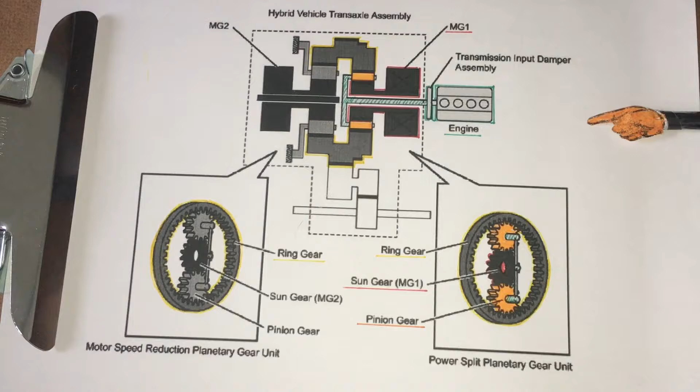So, how to make sense of a hybrid vehicle in simple terms? Just an introduction. I came across this drawing in the manual here, guys, and I think this is as good as any place to start to try and get an appreciation for the overall workings of a hybrid vehicle, in this case the Prius C.

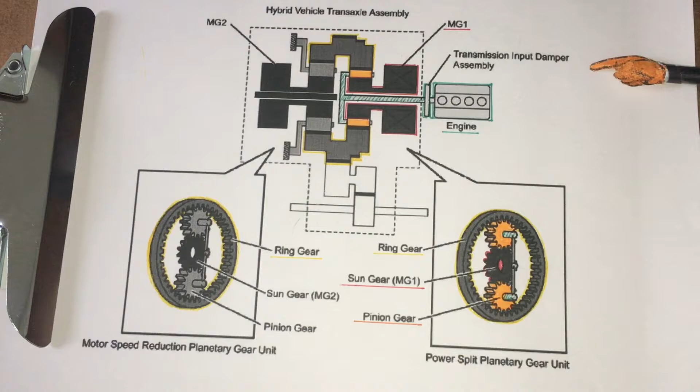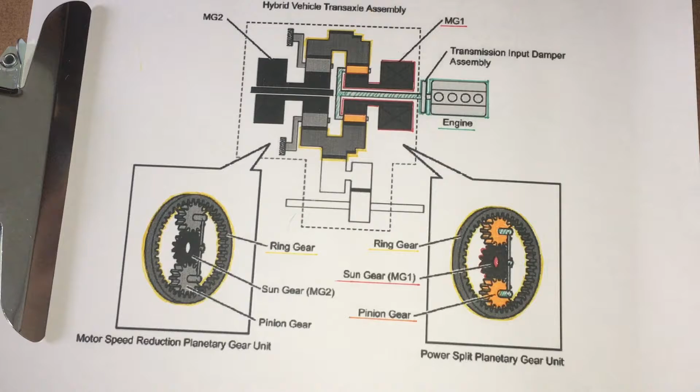So what we actually have on this drawing is, obviously, a hybrid vehicle takes an internal combustion engine, and generally speaking a motor generator is combined in a power splitter device of sorts in order to utilize the best characteristics of both, realizing the efficiencies from that process.

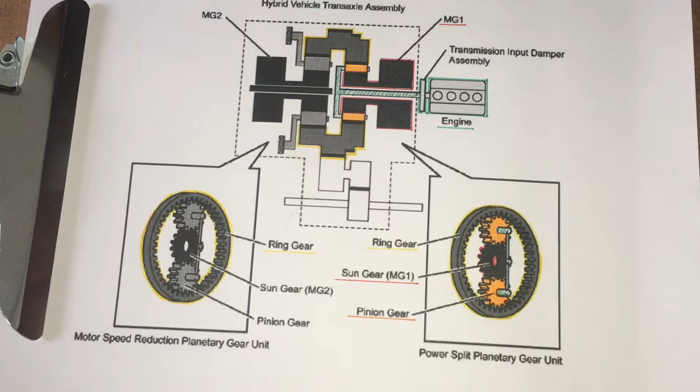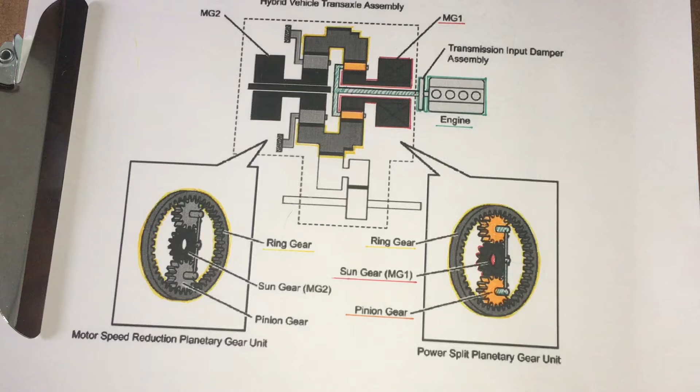So what do we actually have on this drawing? We have the transaxle assembly or power splitter device, which basically consists of a cluster of two planetary gears combined into the one assembly, and it affords us the electric or electronic CVT function.

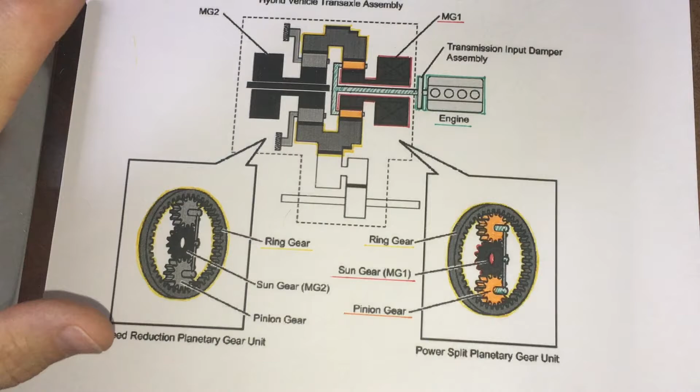It's an ingenious device, a wee bit difficult to wrap your head around initially, but we'll take it one step at a time. What I'll do in this segment is simply discuss one mode of operation, just the ready function, where you actually step into the car, power it up, and nothing more.

So you're essentially sitting there with the vehicle powered up in park, and we'll see what transpires. We'll go through a scenario. So again, what do we have on the drawing? The power splitter device, the two planetary gear stacks, motor generator number 1 and 2.

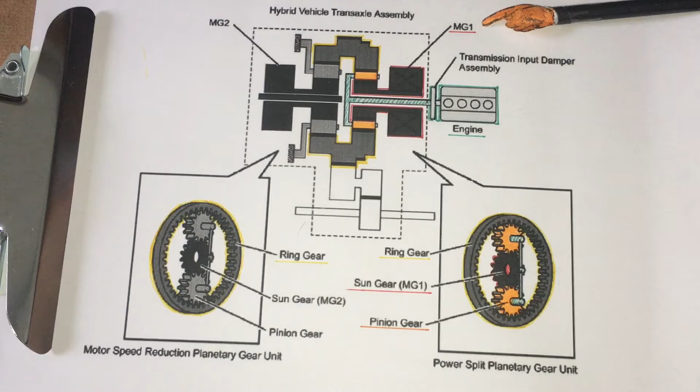In general terms, guys, on the Prius C, motor generator number 1 is utilized for a traditional starter operation and alternator operation. That is to say that we can start the vehicle utilizing MG1. We have no traditional starter—it's done utilizing the motor generator 1 function.

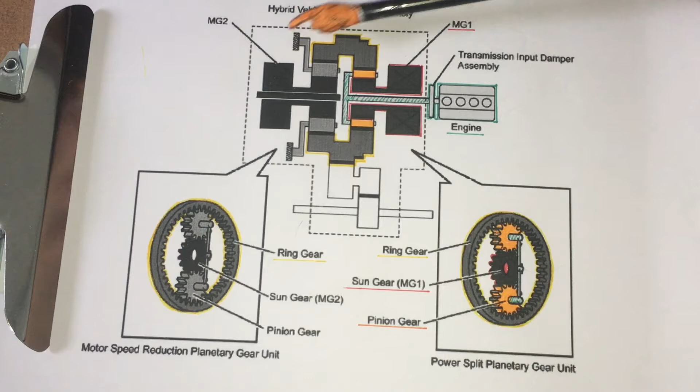And we have motor generator 2, which in general terms affords us the traction effort. So it gives us electric drive operation, if you will. And we can combine the internal combustion engine, shown in green here, and motor generators 1 and 2 in different modes of operation, again in order to realize maximum efficiencies.

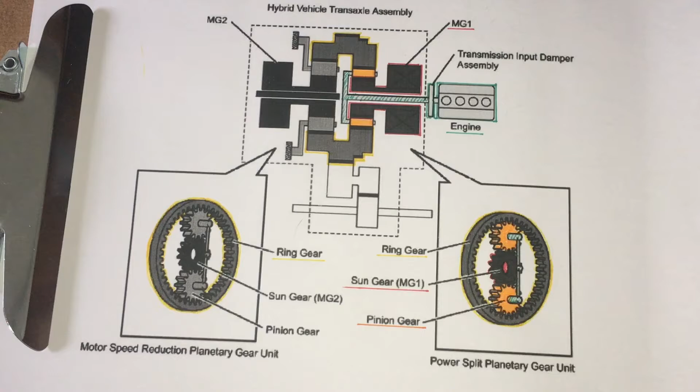So you can see the planetary stack 1 and 2. We have a common ring gear here, guys. I've color-coded this drawing here to try and let you appreciate it in a wee bit more detail. I realize it's fairly dark and difficult to see the details, but it's the best drawing I could get my hands on. So we have the ring gear here shown in yellow.

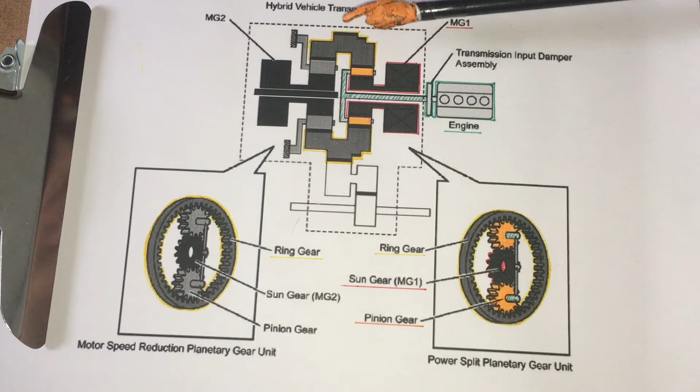The two planetary stacks here have a common ring gear. Keep in mind here, guys, that if this ring gear is turning, the wheels are turning. You may be able to realize in the drawing, it shows the ring gear going to the pinion for the final drive. This is actually the differential assembly going out to the two front wheels in the case of the Prius C.

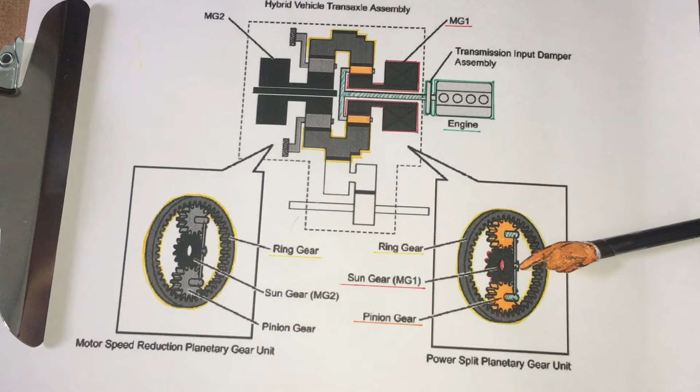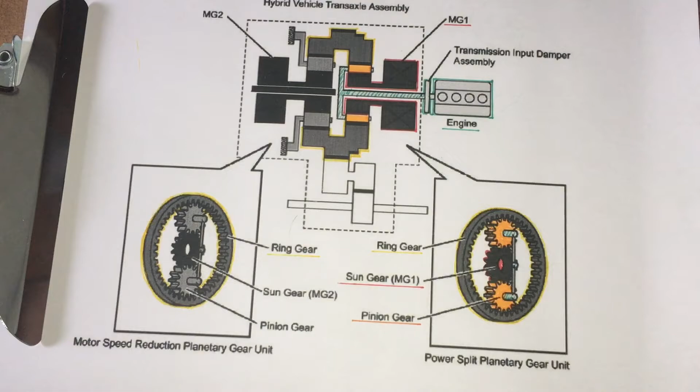And I appreciate there's 2 of these, guys. I'm really only going to focus on the right hand side of the drawing, because it's the part that actually deals with that one mode of operation I'm talking about, just where you're sitting with the car actually ready.

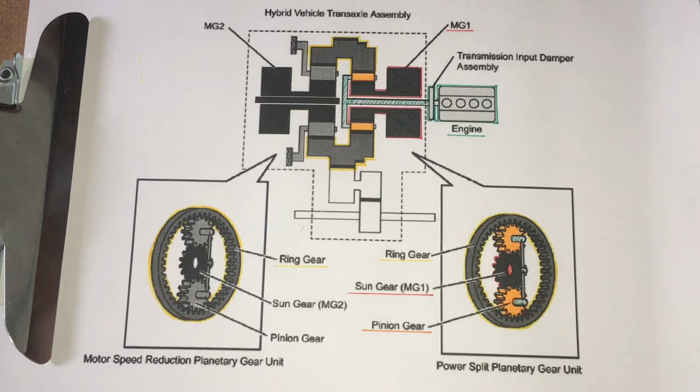And if you sit in the car ready for long enough, once you power the vehicle up, initially, of course, the auxiliary battery, the 12-volt system, is checking to see that everything is copacetic, and so long as it is, all the interlocks and safeties are made. It allows the contactors to close and apply the high voltage battery to put that online, if you will.

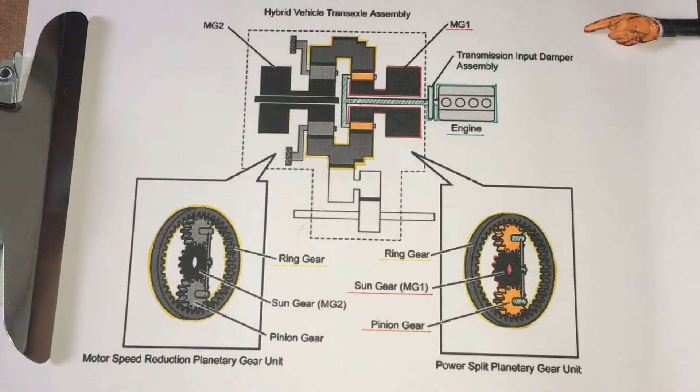And that's essentially what's powering the vehicle, including the aux system, because there's a DC to DC converter in the converter assembly, which is essentially an inverter converting the high voltage DC to AC, because these are synchronous 3-phase motor generators, guys.

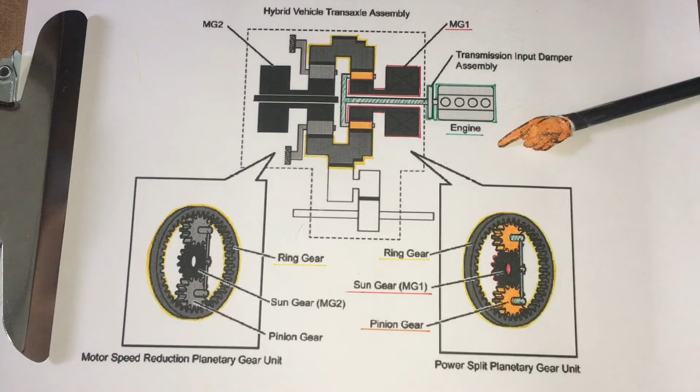So from the high voltage battery, in order to utilize the DC in a 3-phase arrangement, we're going to have to invert it and apply it to the motor generator to utilize the 3 phases. The same goes in the opposite direction, because it can be used as a motor or generator. When it's in generator mode, the permanent magnet rotor induces current into the 3 phases.

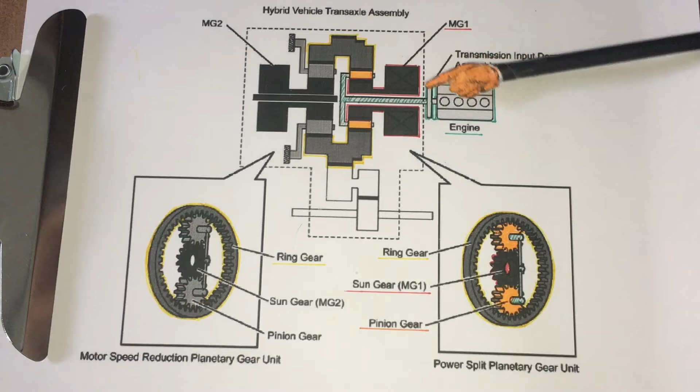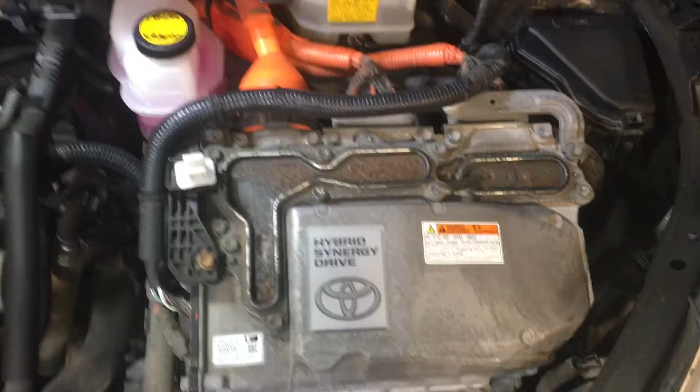That 3 phases would have to be rectified in order to be utilized by the high voltage battery, which is clearly DC. So just for a bit of context, guys, here is the converter with inverter assembly, clearly the internal combustion engine, and living between the two and underneath the inverter with converter assembly is the gearbox down here, right?

So a bit obscured from our view, but this line here is actually the high voltage DC coming in from the traction battery, which lives under the seat, as does the auxiliary battery. I've shown you guys this before.

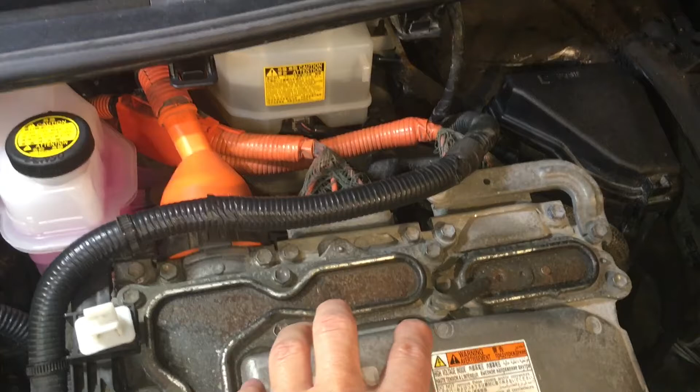So the inverter converter assembly will take that DC in, and if we're looking to drive the motor, for example, it would go through the inverter assembly, because the motor generators are three-phase synchronous permanent magnet drives. That would need to be converted to AC in order to drive the motor.

So this is motor generator number 1 and number 2, both inputs to the motors and outputs from the motor generators back into the system in order to charge the battery. So this will always be DC, high voltage DC, and on the line here will be high voltage AC. The transition between the two will be done inside the inverter converter assembly.

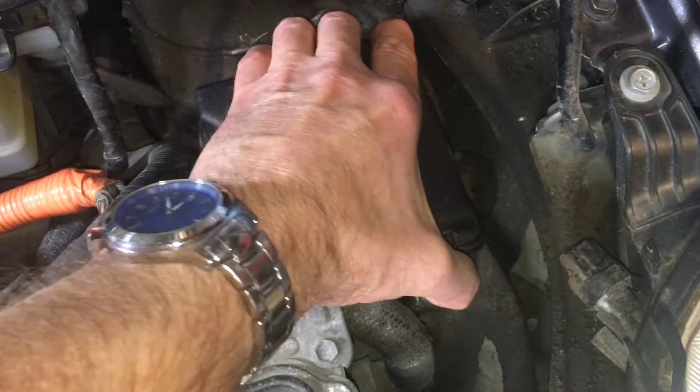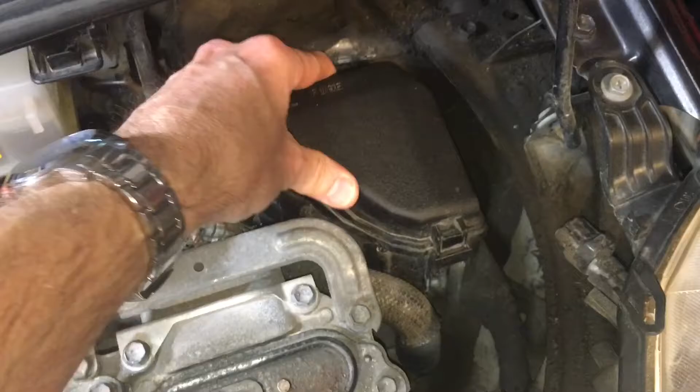There's also a DC to DC converter in here, guys, because inside here is the line that comes from the aux battery - that's the 12-volt line here. We need, obviously, if the traction battery has a nominal voltage of 144 volts, to transition that down to a usable level in order to charge the aux system.

And the high voltage battery is supplying the aux system, all the 12-volt users, as the car actually sits there statically as well. Don't forget, guys, the air conditioning in this is also electric, as is the steering. So there's provision for that as well.

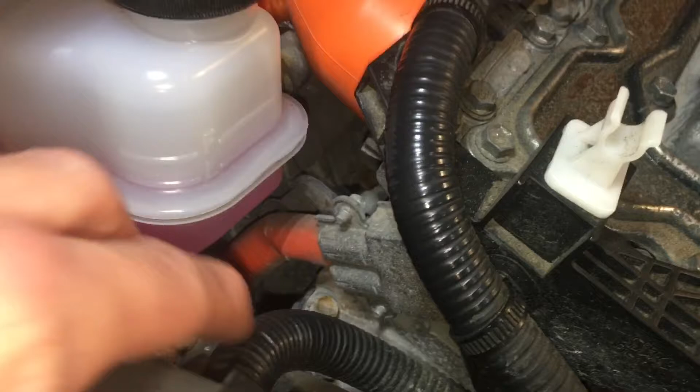There is a tap off on the side there. That's the high voltage line, which is applied to the motor compressor assembly of the AC.

So, and this, as you can imagine, has some massive solid state switching going on, right? Again, more about that later, guys, but this will generate a lot of heat.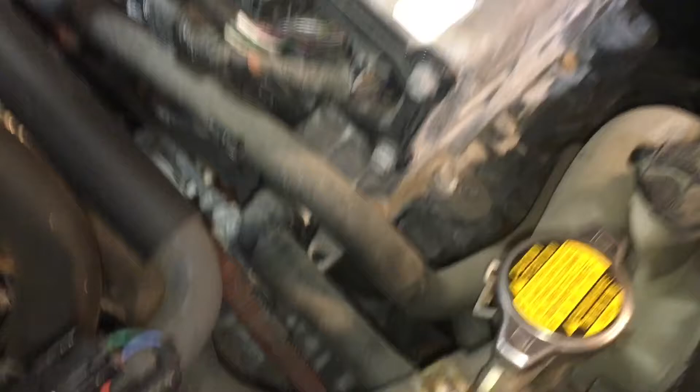And it actually has its own dedicated cooling system here. You can see one line in, or that might be out, and a line here going back to the reservoir. So that's actually the line in, I believe. That's probably coming from the water pump.

Yeah, this line here down to, again, an electric water pump. It's duty cycle controlled depending on how much cooling we actually require. Its coolant will circulate through the system, back through the converter, back to the reservoir.

So yeah, a lot to take in. We get into the car, hit the power on button. There is no starter per se, but so we power the vehicle up, and everything powers up.

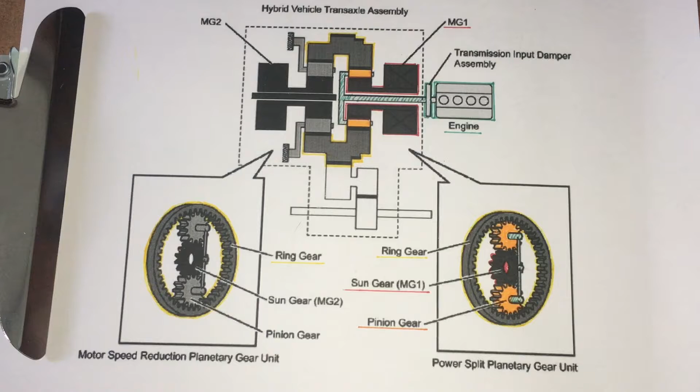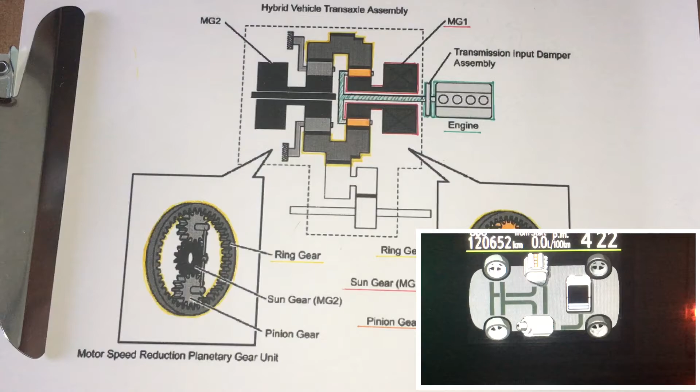So if we sit there for long enough, obviously the high voltage battery will deplete. In the case of the Prius C, there's some conditions where, if we drop below 40% state of charge on the battery, for example, we need some facility to replenish that charge, in order to keep the battery within its window of health, which sitting statically in park is basically between 40 on the low end and 45% state of charge on the high side.

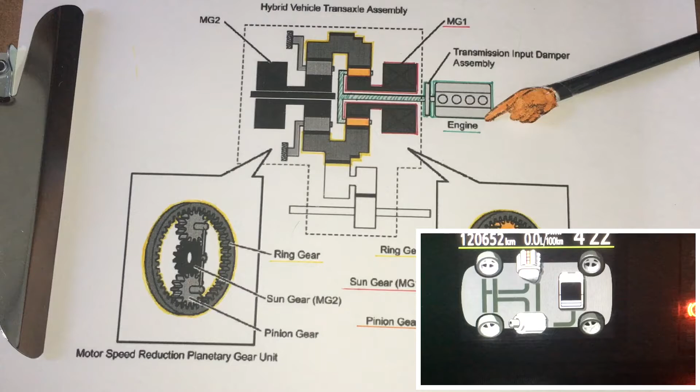So what happens is the power management control module will actually see that the battery is depleting, and what it will do is call for the internal combustion engine to come into operation. Why? In order to drive motor generator number 1 in order to replenish the battery.

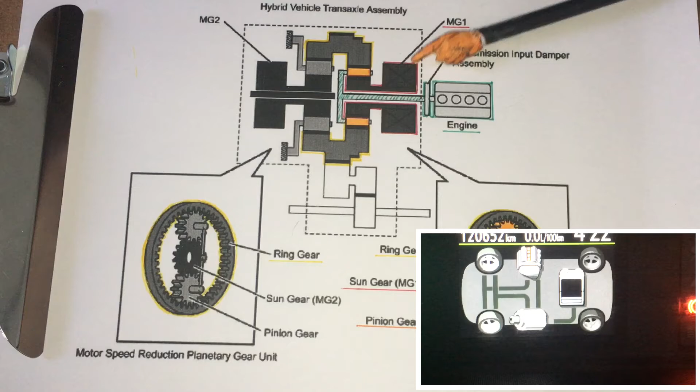So what happens is motor generator number 1 will initially go into the motor mode of operation, generating torque in order to drive - you can see here - through the pinion, through the pinions and sun gear.

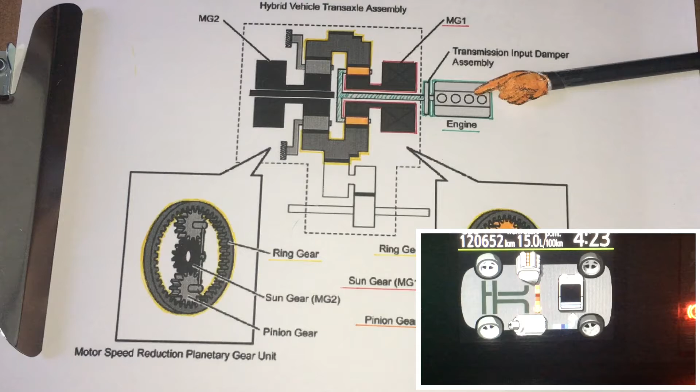It will back drive the shaft here, as you can see, in order to rotate the engine. The engine and the power control module and the engine control module are talking via the CAN bus, I'm quite sure, and will enable the fuel and ignition. We'll get rotation from motor generator number 1. Once the engine comes up and online, now we can actually back drive the system via the damper assembly here.

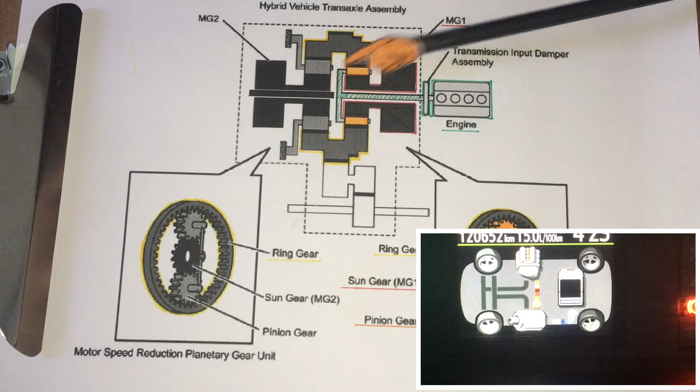This damper assembly, in case you're wondering what it is, guys, just imagine it to be like on a manual gearbox, the clutch and flywheel arrangement. There's torsional springs in the center, the hub of the clutch disc, that's just utilized to take up the torsional shock. It's essentially very similar in operation and design to that. No clutch per se, but a damper, to take out the rotational shock.

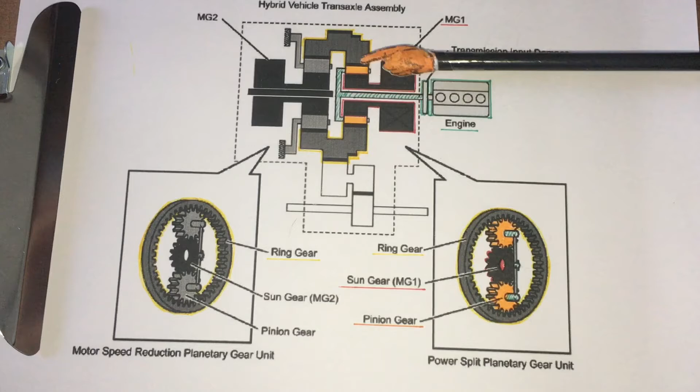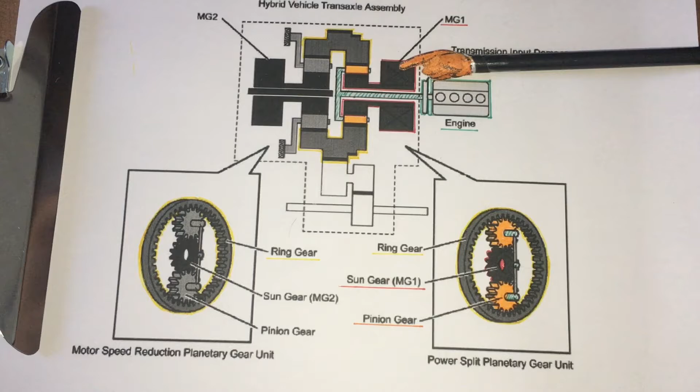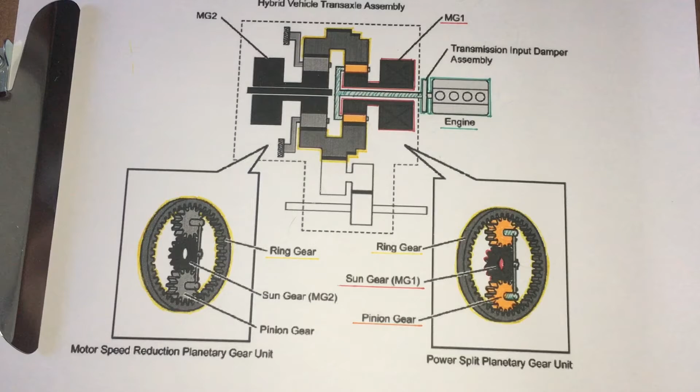And then the engine can actually backdrive motor generator number 1 through the sun gear and pinion arrangement. It will be rotating, and then you can utilize it in a generation mode in order to replenish the high voltage battery. Again, it would be done so that 3-phase power would be transmitted or transferred to the inverter assembly. Inverter with converter, it would be rectified and then stepped down in order to charge both the high voltage battery and indirectly the aux battery through a DC to DC converter. Obviously the battery is at 144 volts nominal. We're going to have to chop that DC up and essentially transform it down until probably 14 volts, 16 volts, something like that, in order to charge the auxiliary battery.

So again, a lot going on here, guys, but this planetary arrangement is utilized to combine the efforts from motor generator 1 and 2 and the engine. And I think that basic mode actually begins to show us on a functional level how this all operates.

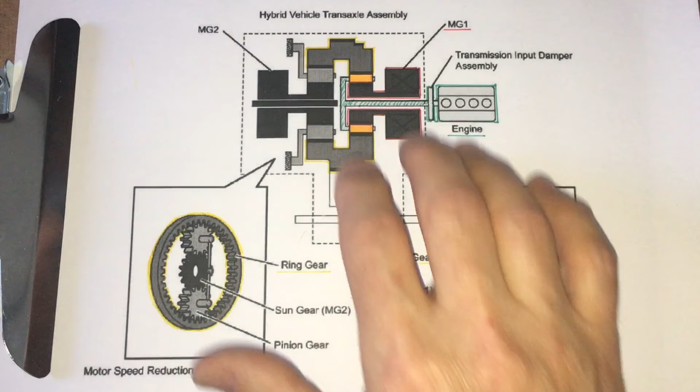So let me show you some details from a scan tool that will maybe clarify this basic mode, park mode, let's call it, of operation, and how motor generator number 1 in particular interfaces with the engine, the internal combustion engine, and how the two actually operate in unison in order to sit there and park and ensure that the high voltage battery stays at a reasonable state of charge.

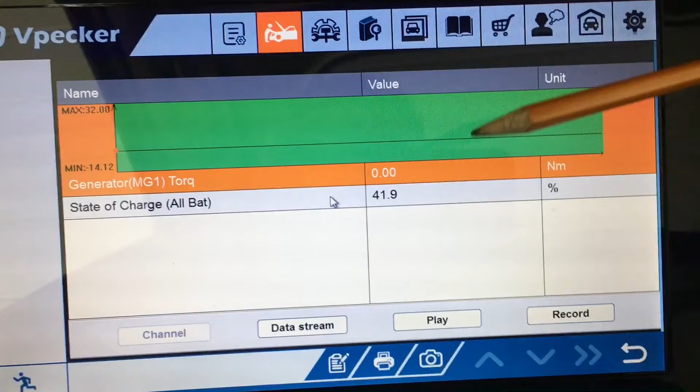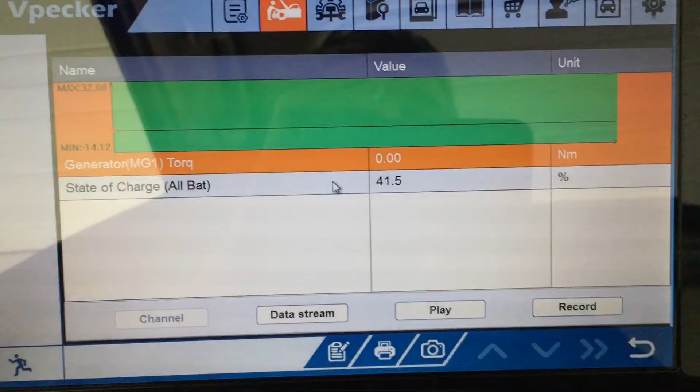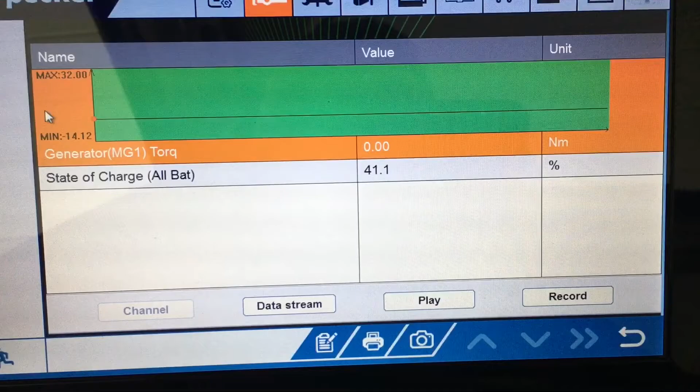Okay, so what I'm trying to capture here, guys, is the torque that's actually being applied from motor generator number 1. If motor generator number 1 is operating in starter mode, i.e. it's about to bring the internal combustion engine into operation, it will rotate the crankshaft via the transaxle planetary gear cluster. It will apply a positive torque in order to get the engine to actually rotate, and then once the engine is operating, we can apply the torque in the other direction, transition motor generator number 1 into a generator mode, and the torque should be applied in the opposite direction.

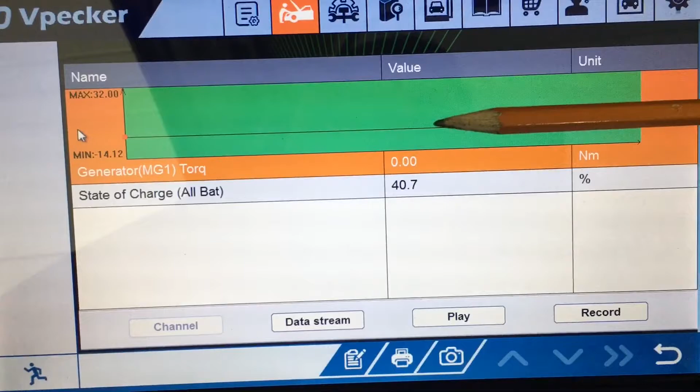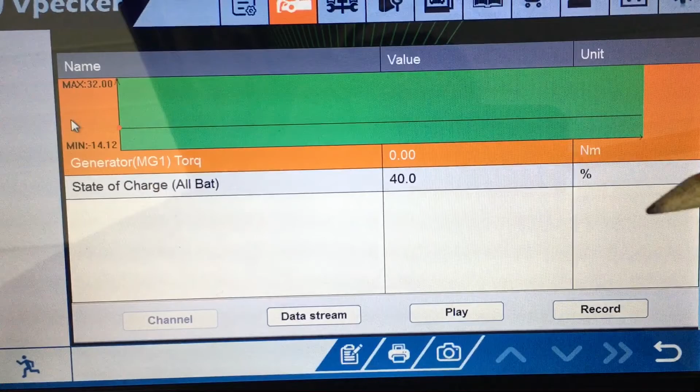So the line here I have graphed - I just have the state of charge of the battery here, guys. As this drops below just below 40, that's when the call for the internal combustion engine will be made in order to apply the drive, so we can replenish the charge in the battery. So I just have that on the PID, the data, and I'm graphing, as you can clearly see, the torque - this is the positive direction and the negative direction. It's at the 0 line at the moment, so the engine should be starting here momentarily, if I've got my understanding correct.

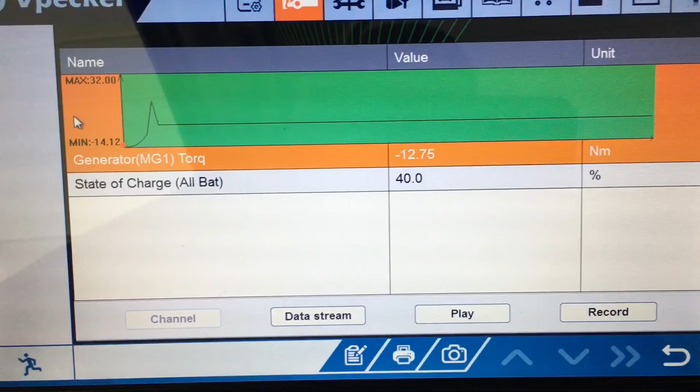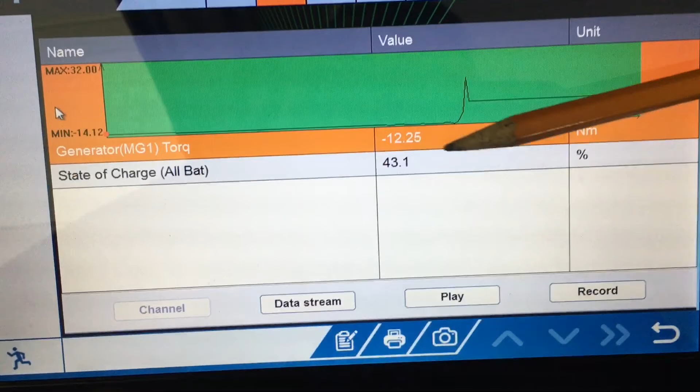There it goes. You can clearly hear the engine is operating here, guys, and there you go - you can clearly see a positive torque applied, and then as it transitions into generator mode, the engine's up. It takes this amount of time for the engine to come up to speed, and then we transition into the generation mode. Now we'll actually go minus 14 Newton meters of torque. That's because we're driving motor generator number 1 as a generator now, which all makes sense. I hope it makes sense.